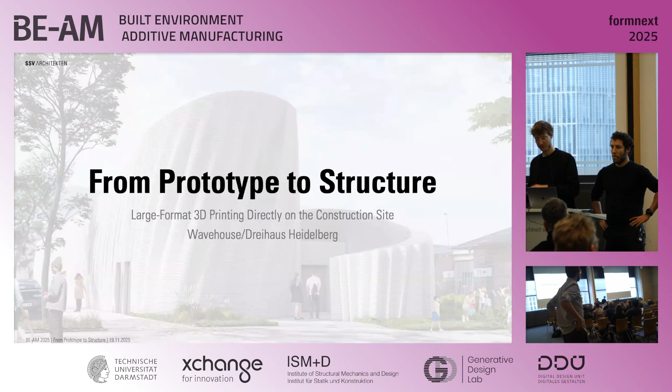My name is Johannes Pfau, I'm a managing partner at SSV Architekten in Heidelberg, and I'm pleased to give you a brief introduction to our project, the Wavehouse. And I'm Florian Bienefeld, the architect in the office who supervised both construction sites.

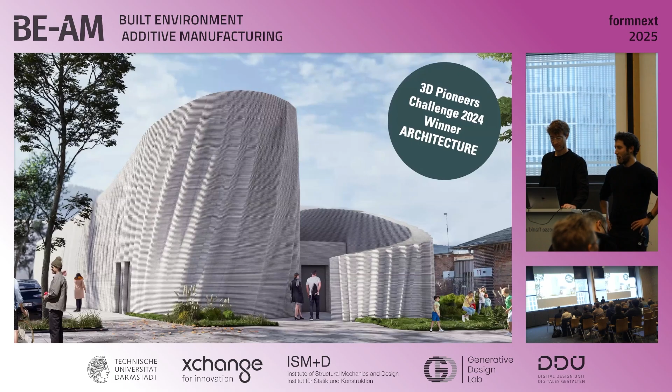Our office consists of a team of 50 architects and planners working mostly on local projects across Heidelberg and the region, ranging from laboratory buildings and educational facilities to housing and museum projects. Over the past years, our focus has shifted towards the refurbishment and transformation of listed cultural heritage buildings.

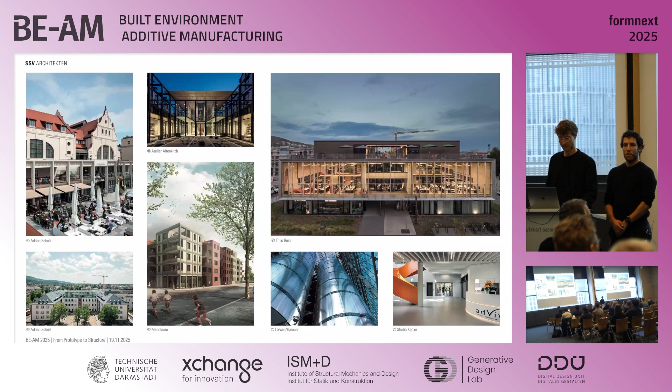This context also applies to the Campbell Barracks in Heidelberg, an ensemble of former military buildings from the Second World War, later used by the US Army as NATO headquarters, and only recently released for civilian redevelopment.

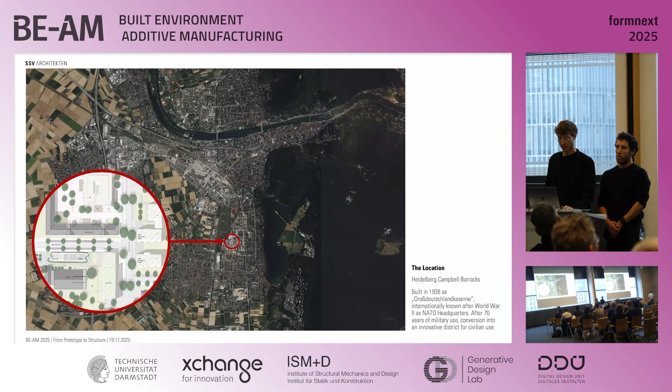There was a small site where we should build a server hotel. One of the last pieces within the large urban transformation was the Wavehouse, a data center building designed to function as the server hotel.

The initial form, a simple rectangular box without windows, was quickly defined, but as you can imagine from the image, it was not very satisfying in an architectural way.

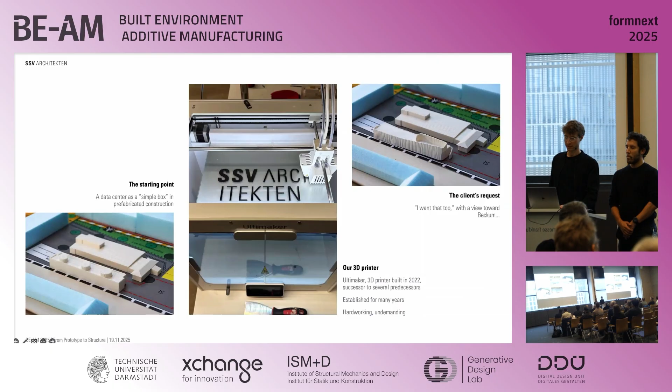After some deliberation, our client showed us a picture from the house in Beckum and said, I want that too. We had been working for years with our own in-house 3D printer for architectural models, and we confidently agreed to do that project.

The project team assembled very quickly. The client wanted to build on the experiences gained in Beckum, and so PERI and Mense-Korte were brought on board, and given the local proximity, it was natural to involve Heidelberg materials for the concrete.

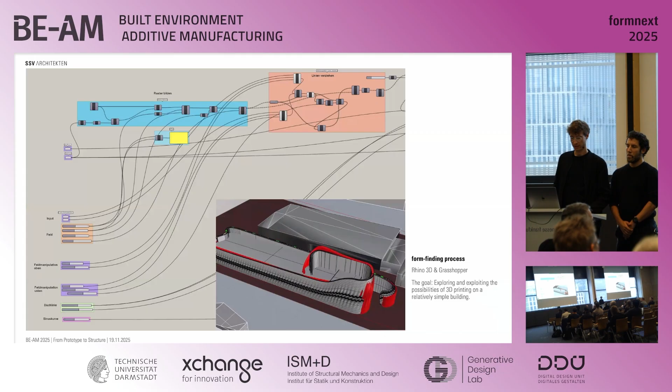The primary aim of the project was to explore and push the limits of large-scale 3D concrete printing, as this was, or is, I'm not sure, the largest print in Europe. The first phase of form finding was carried out using Rhino and Grasshopper, followed by several optimization loops to adapt the geometry to the printing constraints and technical limits like overhangs, etc.

Additional design variants helped define the architectural expression, and on the southern facade we collaborated with the landscape architects to integrate areas of vertical greening, both as solar protection and to visually break up the long wall facing an adjacent kindergarten.

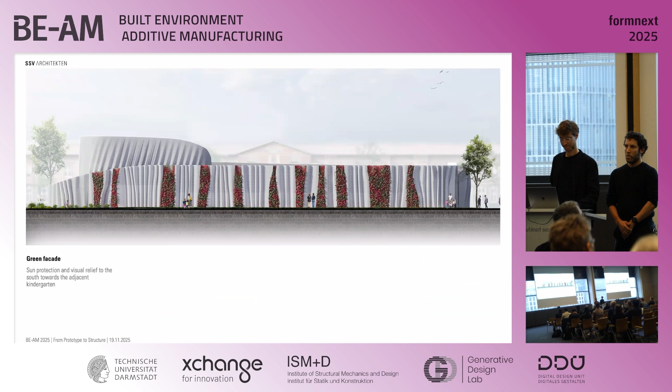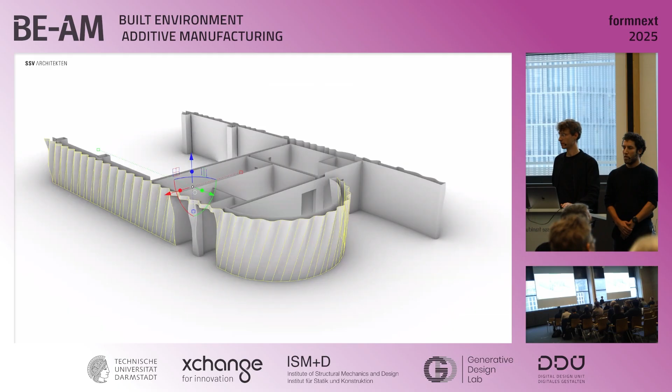The final digital model was then subdivided into print segments and, with almost no further processing, sliced and sent directly to the printer. The building had to be divided into 3 print phases because the COBOD printer has limitations in length, width and overall height.

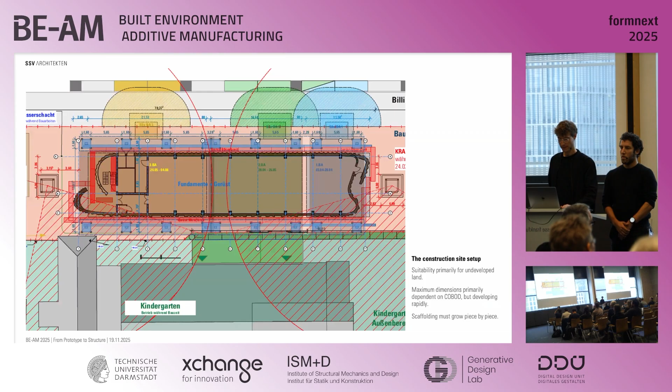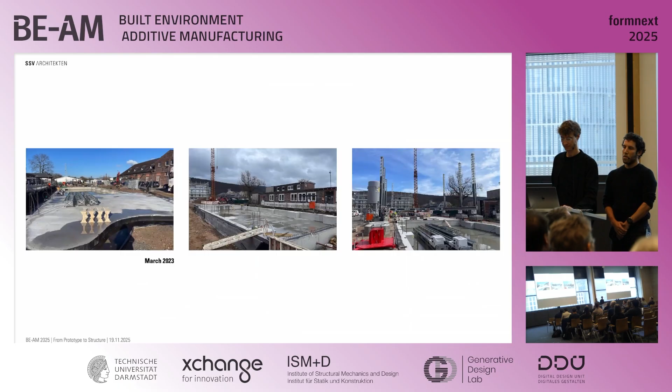In February 23, the first tests were carried out in the fabrication hall while a conventional ground slab was being constructed on the site. In March, the printer was erected and calibrated.

In April, the actual printing began, and we could observe how the first walls rose surprisingly quickly, 1 square meter per hour. You can see the 2 thin outer printed shells here, held in place by stainless steel wires, approximately every meter of height.

The printing had to pause so that the cavity could be filled with in situ concrete, because at that time the material approval did not allow the printed concrete to function as a fully load-bearing wall. But we have progressed since then.

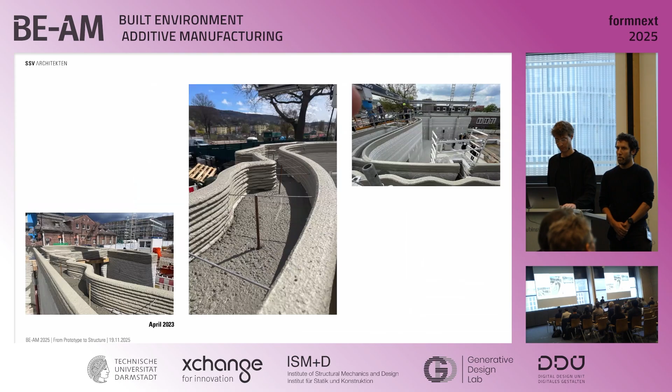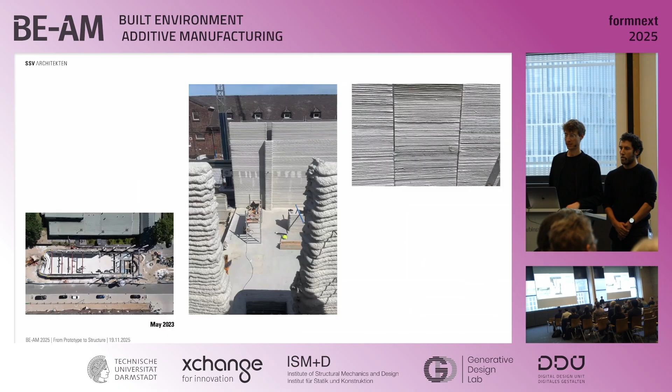By May, the printer was already being reconfigured for the 3rd construction segment, and the segments were separated by gaps into which prefabricated elements were later inserted, elements that had been printed simultaneously during the process.

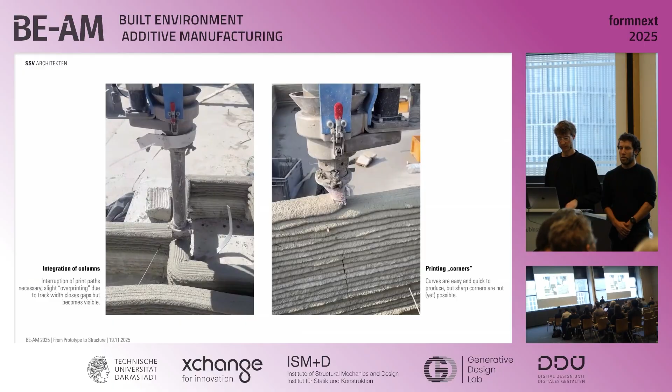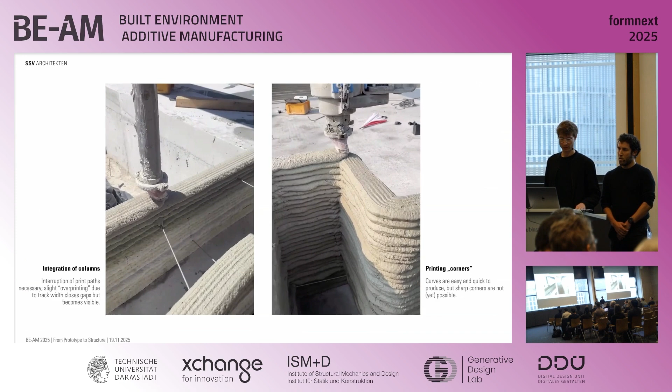For the integration of columns, the printing path had to be interrupted, and there was this slight over-extrusion that occurs to close the gaps, but this interruption remains visible afterwards. And of course, sharp, perfectly pointed corners cannot yet be produced with this printing method.

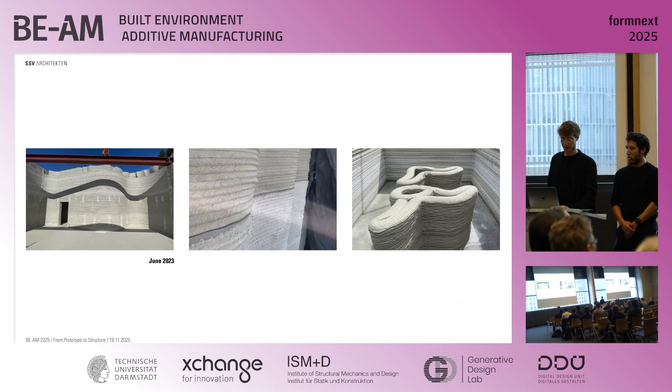The vertical print joints and segment transitions are clearly visible in the facade, and for that reason a surface homogenization treatment was applied later. Small experimental interventions, such as spontaneously printing outdoor seating elements, were valuable on-site experiences for us.

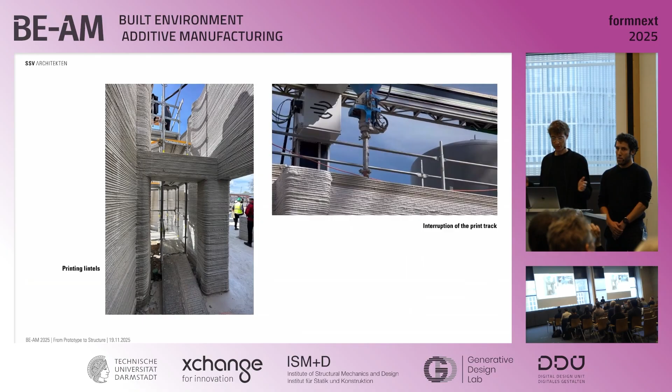To create openings, conventional lintels were still used in this project, but each time the printer had to pause so that a board could be inserted by hand, which again left visible interruptions.

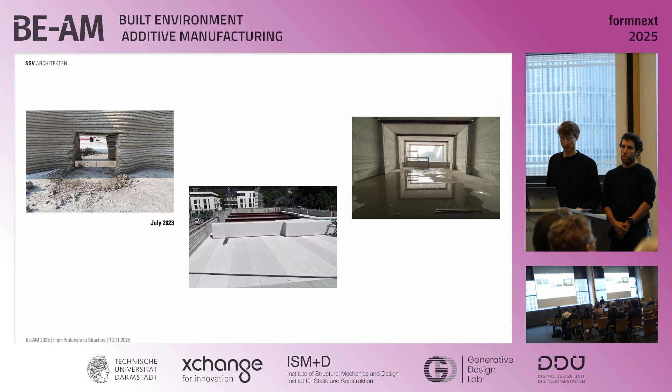Also, penetrations for technical services were likewise introduced manually. The roof slabs are still entirely conventional, as precast slabs currently remain unbeatable in terms of speed and costs.

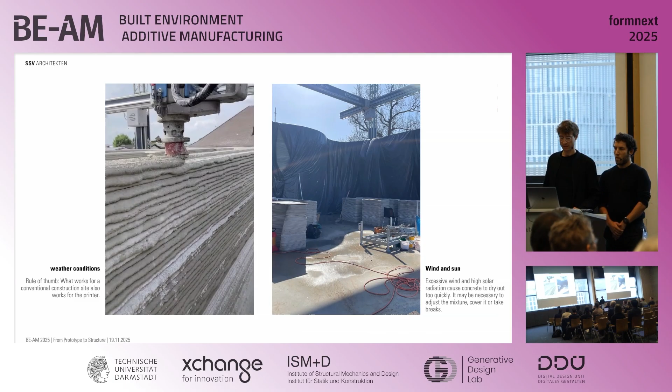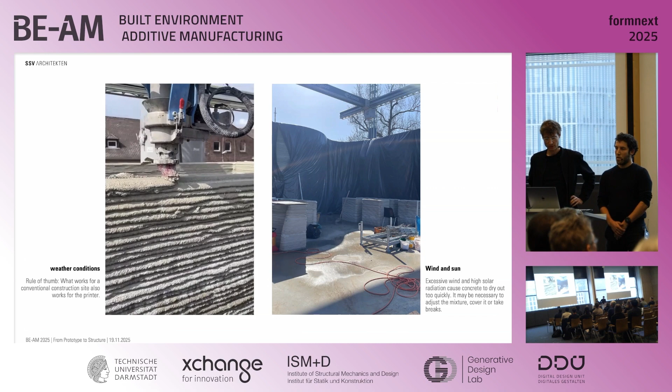In terms of weather conditions, we learned that the printer offers neither significant advantages nor disadvantages compared to a conventional construction site, except perhaps the workers can take shelter during rain and stay dry. Wind and sun, however, are very challenging. Strong wind or intense solar radiation causes the printed layers to dry too quickly, leading to shrinkage cracks. We had some of them, but fortunately, in our case, these had only visual and not structural implications.

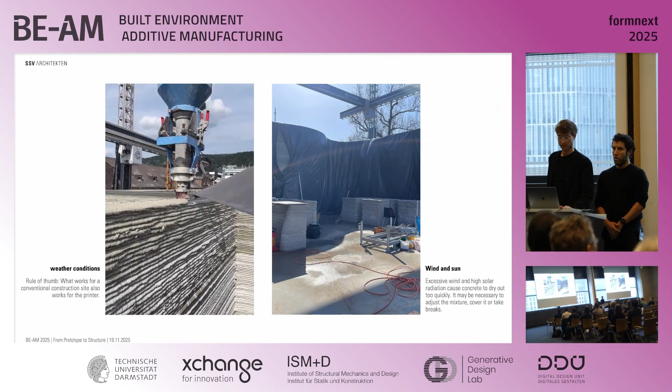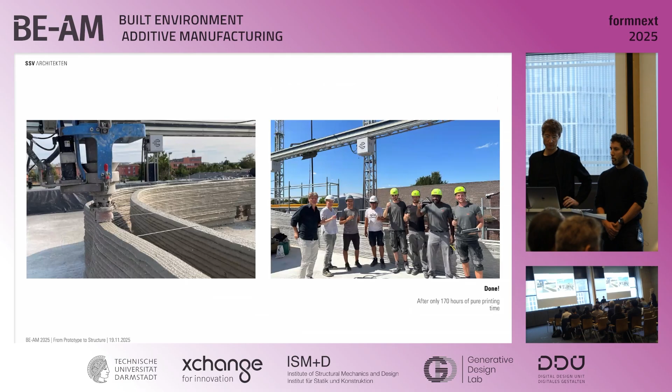After only 170 hours of net printing time, the structure was completed, with an average on-site workforce of just 3 people. Afterwards, regulatory obstacles became a central issue. For example, here you see the installation of fire-rated doors. This was problematic because no approved system existed for integration into 3D printed concrete walls. And so we were forced to remove the printed outer layers down to the cast-in-place concrete core.

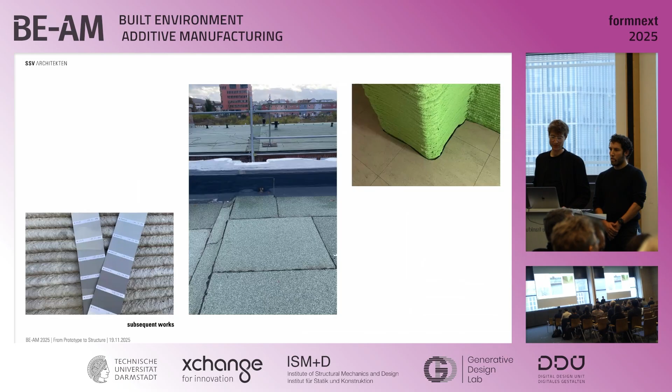Similarly, numerous follow-on trades required creative detailing solutions, since the printing process allows only a limited differentiation of construction details. Perhaps the most remarkable aspect of the entire project for us was the extremely high accuracy between the digital planning model and the build result, and all this without the extensive documentation effort typically required in traditional 2D planning.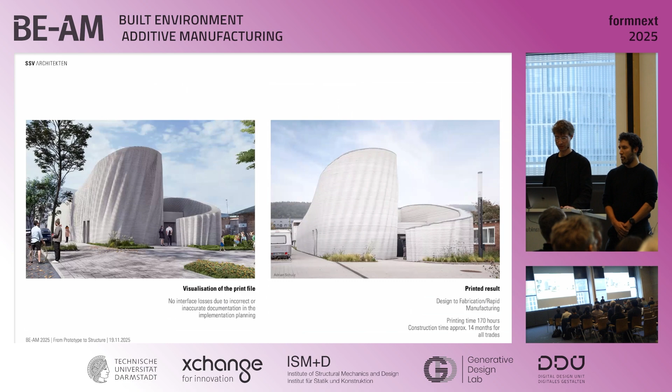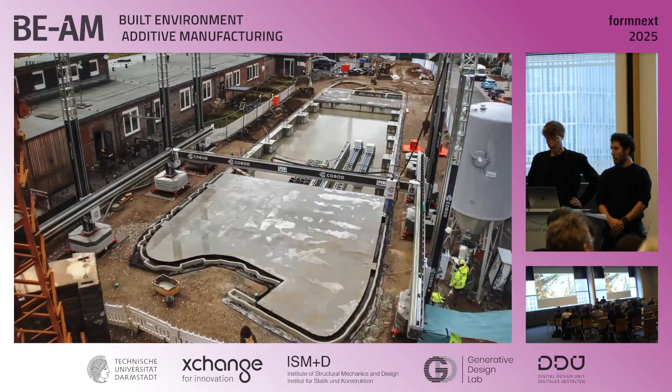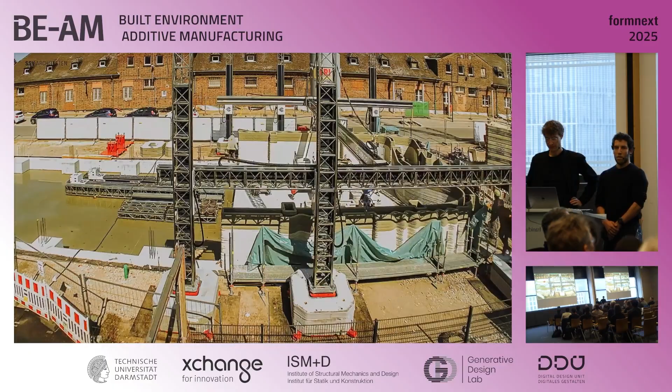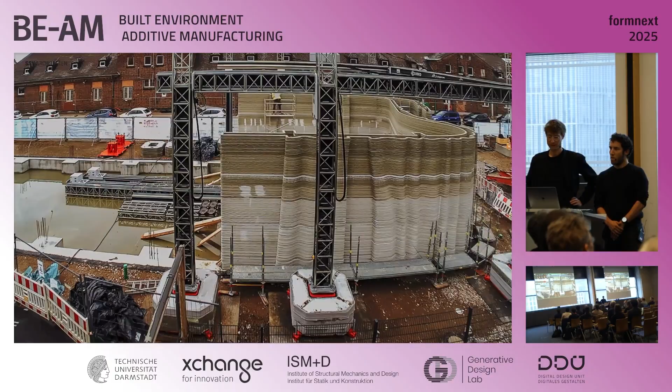Here you can see the conventional slabs, and then the walls growing in the first part. In the middle, you can see the precast elements to close the gaps. And it works like on the small 3D printer in the office, just bigger.

As you can see, we had difficulty with the lintel in the last project, so we decided to remove all the lintels. We have only windows from bottom to the ceiling, then we have no problem with the roof parapet. We have a wooden roof on top. We optimize the process, I show you in the next pictures. And also this project is the start of making 3D printing in housing scalable.

So the project consists of 3 buildings, but the buildings only consist of 2 different halves. So we combined in 3 different varieties the halves of the building. So in future we have a large variety and different use cases for that.

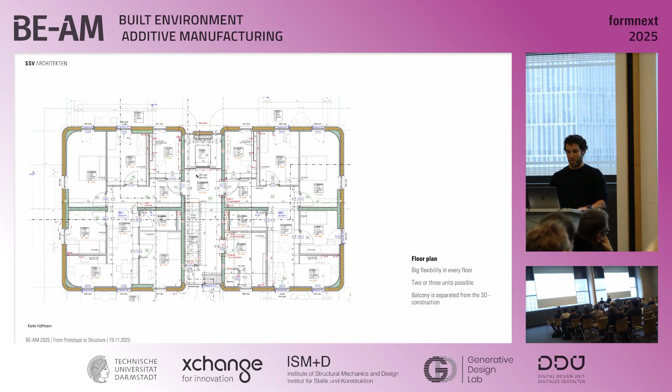The printing process is optimized. You can see it here. We have a left and a right side, and the printer prints on one side of the house, while when he switches to the other side, the companies make the ceiling of the first floor, and when he's done, the printer switches to the second side. And we separated the balcony from the building because this would be a lot of trouble during the process.

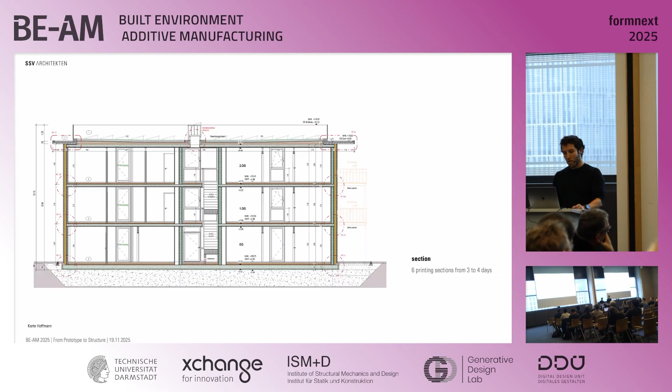So here in the section you can see we printed on the left side, we move to the right side, and then the building grows step by step. Like you can see here on the construction site, one side is always smaller and we print, and on the other side there are normal workers, how we know them from every other construction site.

Here we have some details, because that's also a big problem. On paper it's easy, but on the construction site we have to make the details work. So the first picture is the connection from ceiling to wall, and what's different on this building is that we actually have 3D printed walls that are carrying the ceiling. We also have walls with concrete in it, but that's the first time in Germany that the 3D printed walls are, I don't know the English word, load bearing.

And the second picture is, as you can see, the reinforced back wall of the elevator. That's the only part of the building for the vertical parts with reinforced concrete. All the other parts are normal concrete. And here you see the anchors that put the 3D printed structure together. But we have to consider the position, because we have to put some steel afterwards in the wall. And if the anchors are too wide, it's not possible.

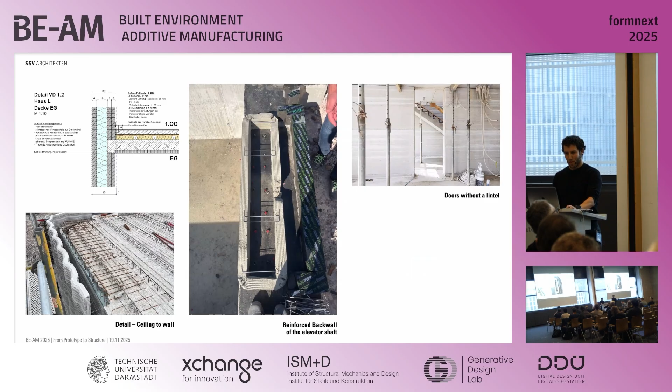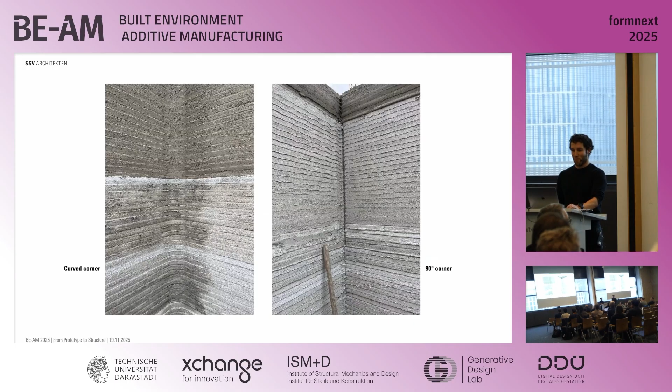Next thing we want to try is different kinds of corners. We have a smooth corner. It looks smoother and nicer, but it's harder for the furniture at the end. And we have the 90-degree corner. There you can go to some stores and buy your furniture like it already exists, and you don't need some extra solutions.

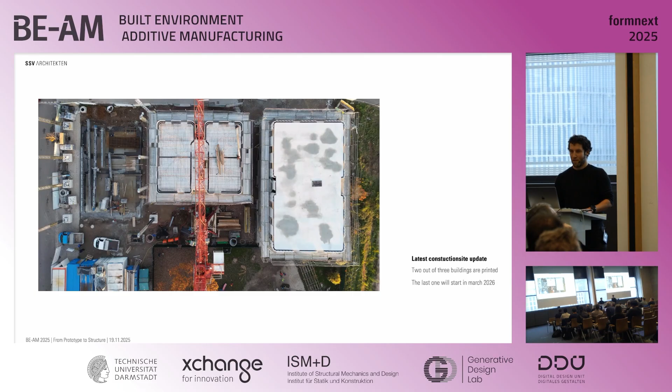The rest is just normal and has to evolve with the 3D printing technology, and it takes a lot of time for this at the moment. And that's the same thing with the time. So when we are fast with printing, or faster than a bricklayer or something like that, it's only the 25% of the building. The rest is just the normal way we did it in the past.

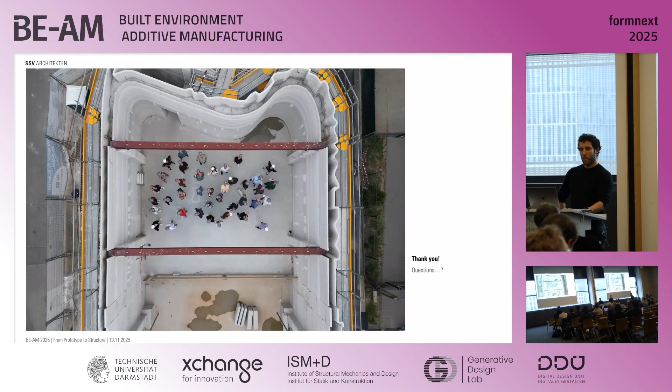I skip one picture back. Yeah, so one of the main factors is the factor time. So we try to make the printer move non-stop. Obviously he didn't move in the night, but every day, from 8 to 5, like the workers for the printer. That was one step to reduce the time for the printer on the construction site.

Another thing we tried here is to reduce the time by increasing the layer height. So the first project was 2 centimeters. Now we have 3 centimeters. It's 1/3 faster, obviously. And as you can imagine, you have layers like bricks. It's just like a layer of a brick, and you have to connect them.

Did this pay back financially to get more efficiency in the production? We are not done yet with the costs because we are not finished. But yeah, it's hard to say because we don't have the detailed cost for the printer itself. The company PERI supports printer, personnel and planning for the printing process. So it's hard to figure out the exact numbers.

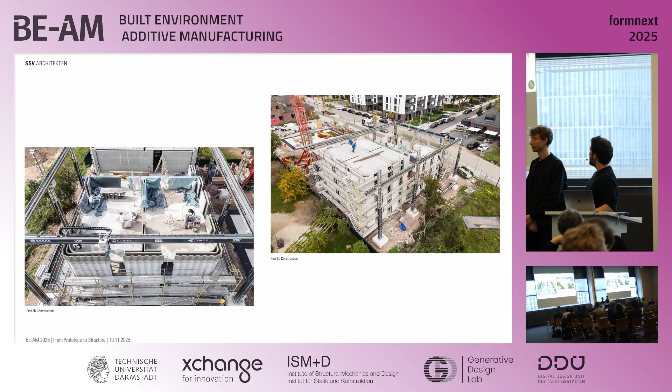So in this project, I have to go to the first picture. Here you can see it. It's a design decision for the first building with the waves. The second one is flat, and the third one will be flat with flaps. So we remove all the material that's over, and we just test what's possible. If it's a design decision, you also can put some material on the printed wall, but it's easier when there is a little difference, not 1 to 2 centimeters. But we don't have relevant cracks yet, so maybe in 2 or 3 months we can tell more.

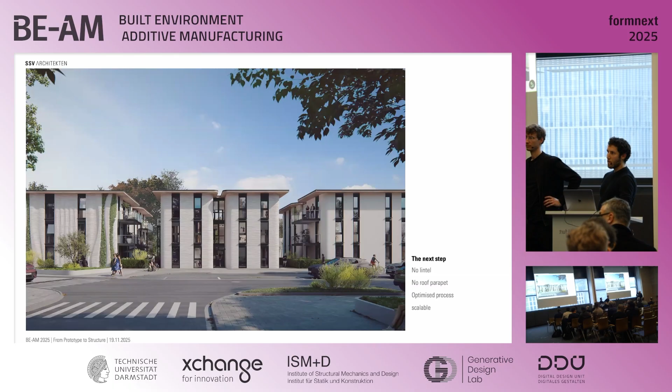I'd like to pick up on that question with the insulation. When looking at the server hotel, I saw you just filling it like a lost formwork, and there was no insulation at all. And I can imagine in such a server hotel, there's a lot of excess heat. Wouldn't it make sense to somehow collect that heat and use it for network heat providing for the neighbors or so? So why don't you insulate the server hotel?

Yeah, we thought about that, and as you said, the servers create a lot of heat. We thought if we insulate it, we have to cool everything down just to hold the heat. So we decided to not insulate it, but we thought about collecting the heat for the neighbor house, and so there are pipes to install this later, to use the heat.

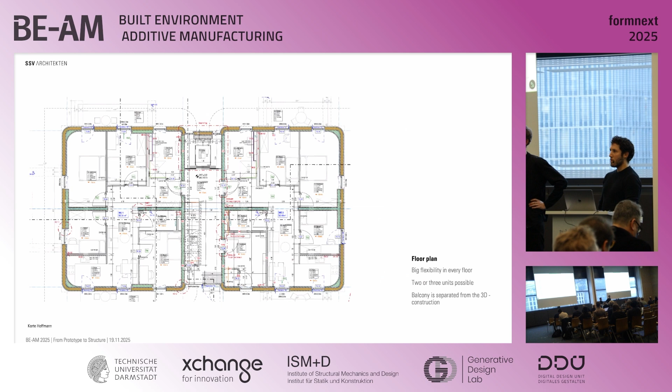Thank you first for showing something that's being built in the market around us. I think it's very interesting. I have a question related to the part of the cost that you showed, because the 25% is where you say that we have some sort of flexibility... No, it's a potential. So we say we will make cheaper buildings with 3D printing, but 75% of the costs have nothing to do with the printing. So we can't save money in those 75% with printing.

Exactly. So my question is, did you do a comparison? For instance, the building that you're already printing is very close to a conventional building, so it can be prefab in a way. Did you compare how costly or even cheaper it would be relative to that? And also, when you do something harder to do with a prefab system, like the more curved design, would you be able to provide numbers of how much it would cost the traditional way versus 3D printing?

So the main idea of the project was from Korte Hoffmann, and they also want to prove with this project that they can build 3D printed housing for, I think the number is 2,900 euros per square meter living. But at the end of the project, we have to be honest and compare those numbers. It's not done yet, so we can't say it, but that's one aim of this project, to prove it or disprove it.

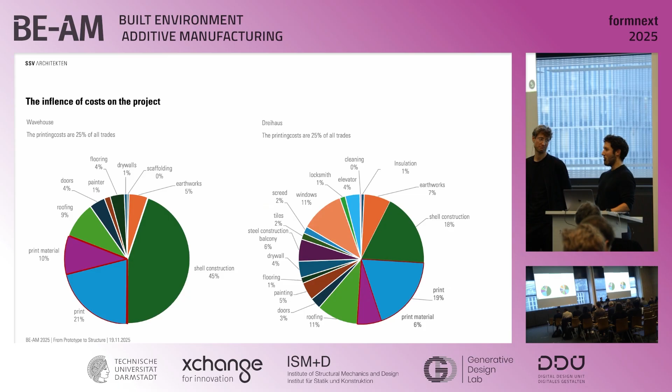And I think it would be good if you publish the numbers like they had with the BKI, with the first house from Korte Hoffmann. In the project, we agreed. When the project is done, we will be transparent. That's good. Yeah, but to lower costs further, I think we have to combine it with other precast elements in the inside of the house.